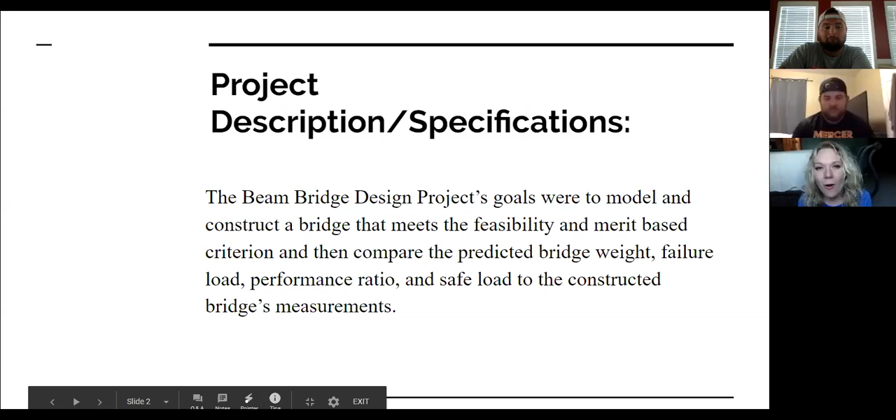We decided to name our team the Warren Buffetts, and we know Warren Buffett has nothing to do with Warren Bridges, which is what our project was about. But we felt like we had to name our team that, especially with this picture, because it accurately depicts how confused we were by this project. Also, the bridge on the right is not a Warren Bridge, but Tanner found it aesthetically pleasing, so he decided to add it to our title slide.

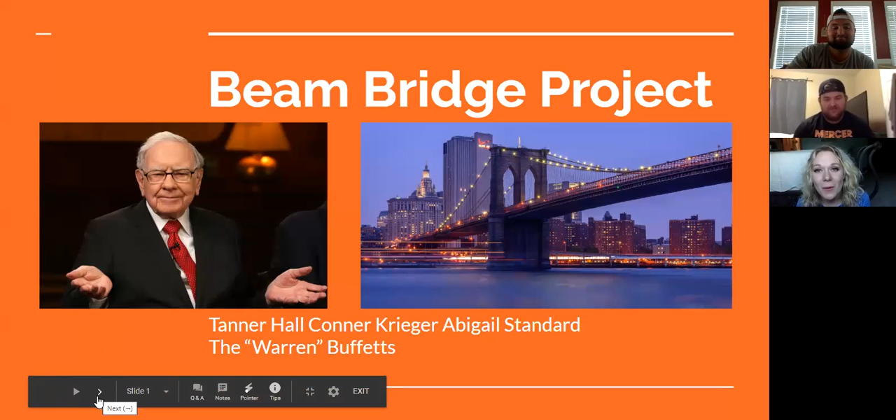Project description and specifications: the Beam Bridge design project's goals were to model and construct a bridge that meets the feasibility and merit-based criterion, and then compare the predicted bridge weight, failure load, performance ratio, and safe load to the constructed bridge's measurements.

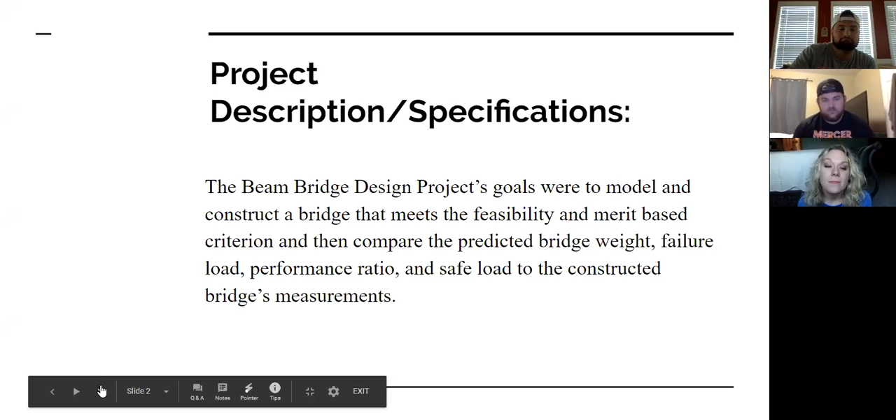This is the feasibility criteria used for the Beam Bridge project. The inside of the bridge must be 2 inches wide and at least 1 inch high. The inside of the bridge must be able to accommodate a road bed, so no sharp peaks. The bridge base must be between 9.9 and 13.8 inches wide, and only contacts the top surface of the buttresses. The eye bolt and chain for testing can pass through the center of the bridge. The testing block, 3.5 by 3 inches, can be supported on top of the bridge. The bridge uses open style truss construction, built with 1/8-inch by 1/8-inch bass wood beams and wood glue. And an object 3.4 inches wide and 1.82 inches tall can pass under the center of the bridge.

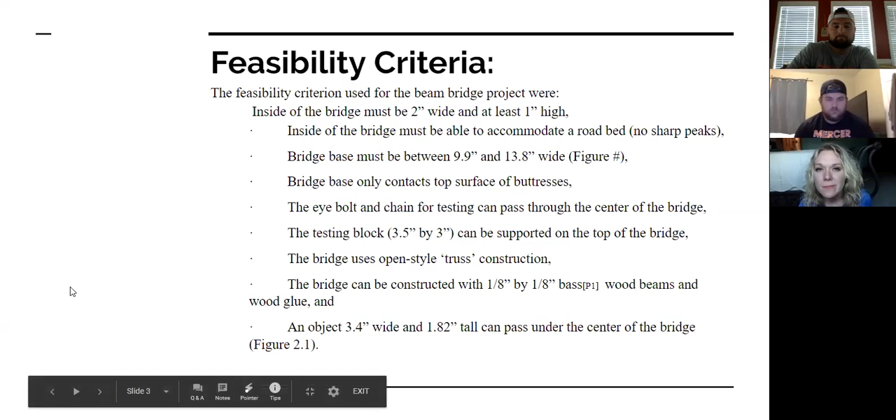The merit criteria measure the bridges on their individual performance ratios and their ease of construction. Each of these criteria is worth 50% of the overall merit points given to each bridge, since they are both deemed of equal importance when choosing, modeling, and constructing the bridge.

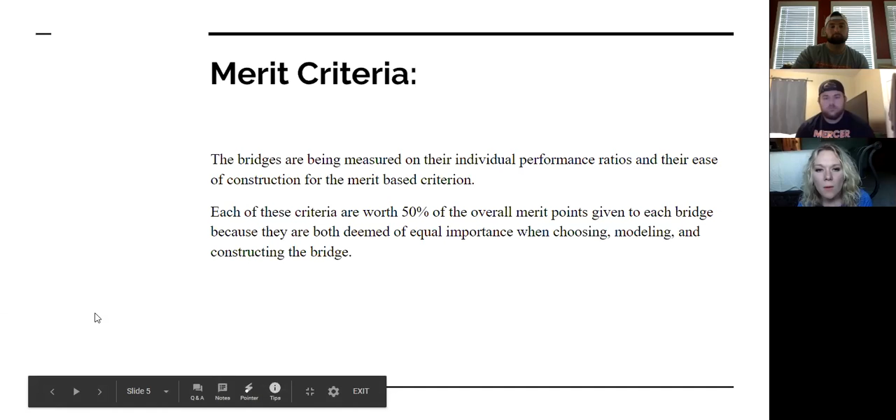This is the ease of construction merit curve. The easiest bridge would have been given 10 merit points, while the hardest bridge would have been given 0. Our bridges all fell between 0 and 10, but none were exactly 0 or 10, since we had to be between the easiest and hardest bridge possible.

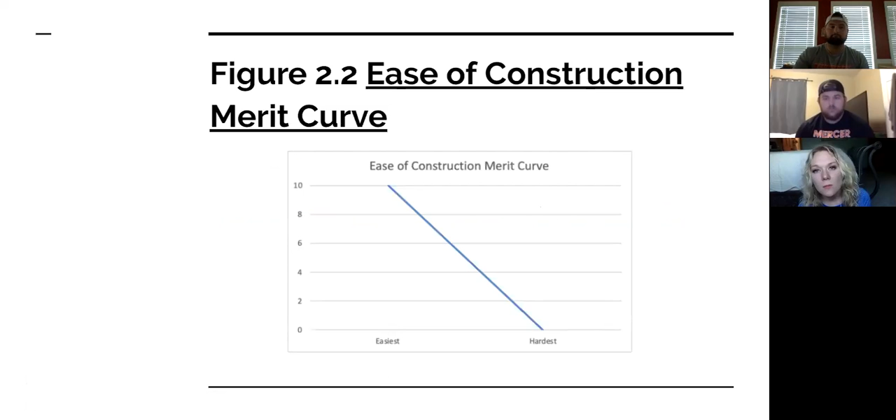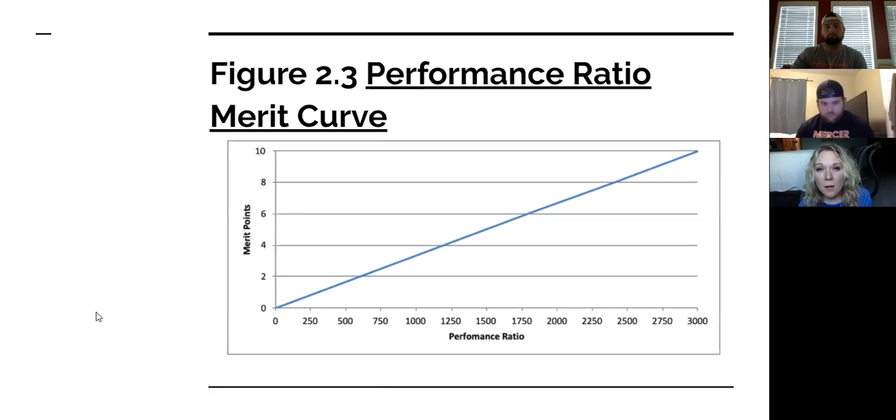This is the performance ratio merit, ranging between 0 and 3,000, which is a bit higher than where our bridges fell. A performance ratio of 0 would give 0 merit points, and 3,000 would give 10 merit points, with our bridges falling in between those points.

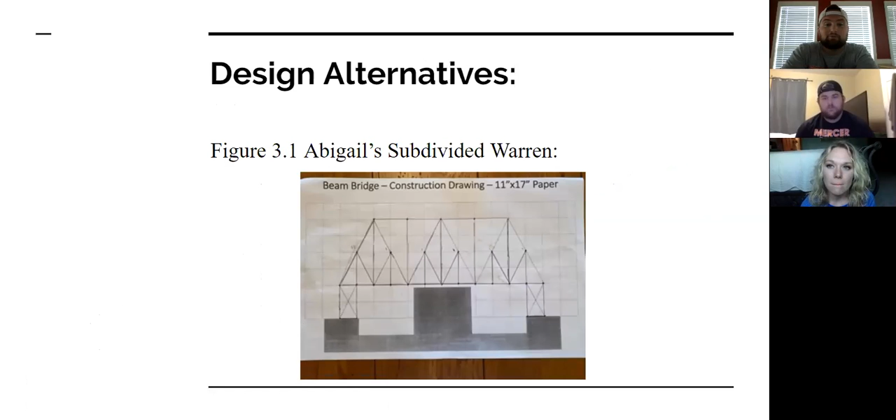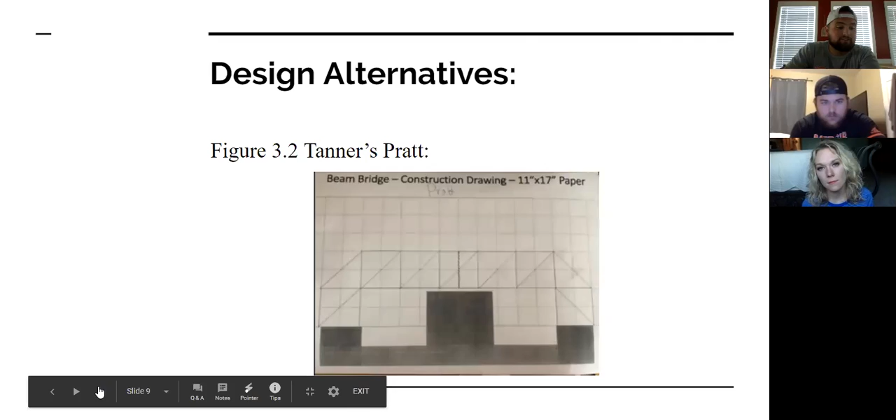For the feasibility analysis, we just went over the criteria we needed. Ultimately, all of our bridges met the feasibility criteria, labeled by the O's here, and as you can see in each column, all of them are checked off, so all of our bridges were feasible.

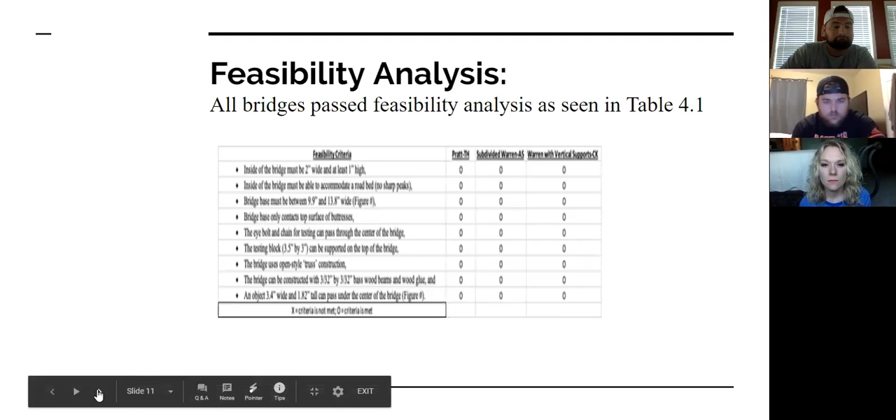Now on the merit analysis, we just talked about the performance ratio and ease of construction as our merit criteria. But before we get into that, we're going to talk a little bit about the predicted models that we built for each alternative.

My Pratt Bridge: the predicted weight was 10.24 grams. The failure load was 18,914.8 grams. The performance ratio was 1,895.45, and the predicted safe load was 9,457.4 grams.

The subdivided Warren Bridge, Abigail's bridge: predicted bridge weight was 24.95 grams, predicted failure load was 8,073.94 grams, predicted performance ratio was 323.6, and the predicted safe load was 4,036.97 grams.

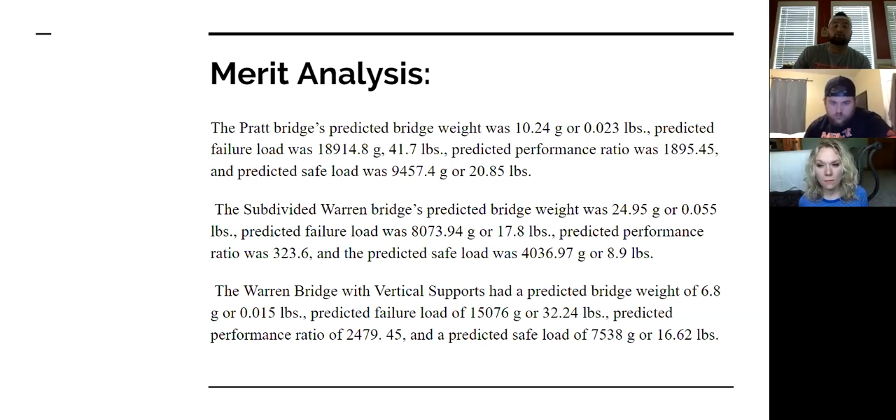And Connor's Bridge, the Warren Bridge with vertical supports: predicted weight was 6.8 grams, predicted failure load was 15,076 grams, predicted performance ratio was 2,479.45, and predicted safe load was 7,538 grams.

Now on to the specific merit analysis, starting with the performance ratio. My Pratt Bridge received 7 points out of 10 for a performance ratio of 1,895. Abigail's subdivided Warren Bridge received 1 merit point for a performance ratio of 323. And Connor's Warren Bridge with vertical supports received 8 merit points for a performance ratio of 2,479.

The subdivided Warren, which was Abigail's design, received a 1 because of the number of members and joints it took to build that bridge. The Pratt and the Warren Bridge came out pretty even with the number of joints and members, so they both received an 8 for ease of construction.

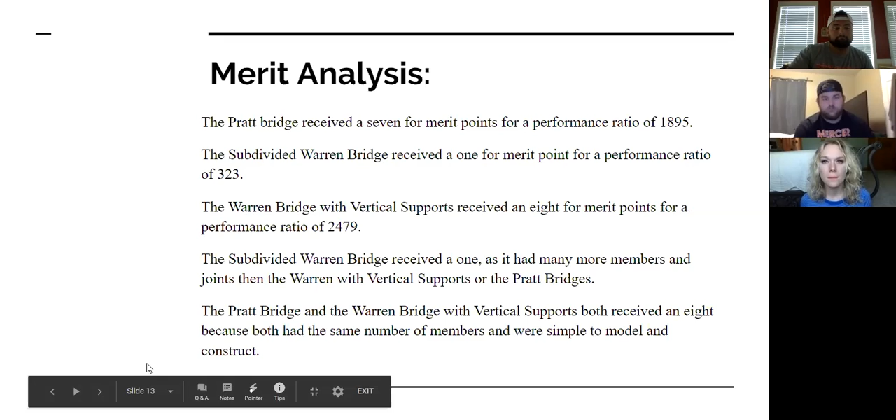This is an easier view of our merit analysis. Like we talked about earlier, ease of construction and performance ratio were 50% each. You can see the totals on the far right of each bridge: 150, 750, and 800. So ultimately, we went with the Warren Bridge with vertical supports because of the 800 merit score.

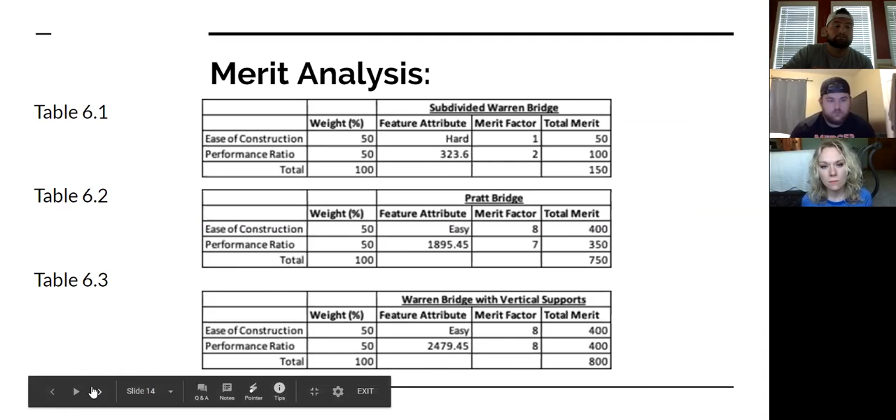After all that, Tanner explained we're going to go with the recommendations that our designs had. The one that Abigail did, the Warren Bridge, received a total of 150, and that was the lowest merit performance we had, along with being the hardest construction. So we didn't go with that one for obvious reasons, being so hard to construct.

The Pratt came in next with 750 merit points, which was a high performance. But then the Warren Bridge with vertical supports actually went a little higher with 800. With both of them having easy construction, we relied on merit points here to decide which one we wanted to do. So at the end, the Warren with vertical supports was what we went with, having the highest merit score.

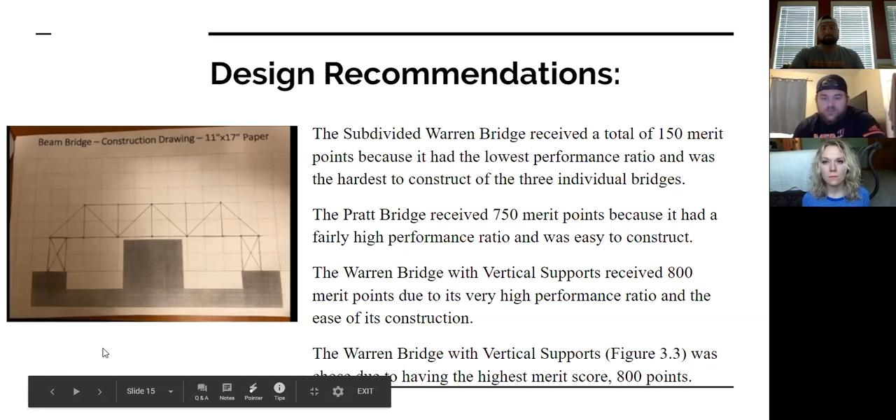The next part is the testing plan. The testing plan was conducted by Dr. McCreanor. We witnessed it over a Zoom session, so we analyzed how the plan went through.

First, he weighed the bridges, and then he pushed a block under it to see whether it met that height clearance criteria. Then he put a weight harness constructed of a string or chain with an eyelet and a wooden block that sat on top of our trusses. Then he hooked a bucket under it, which he placed sand into, and the bucket was hooked up to the bridge through the harness.

He kept filling it with sand until the bridge failed and broke. After that, we measured our performance ratios, and he weighed how much the sand, bucket, and harness apparatus all weighed, put it on the scale, and we got our full weight of failure from that.

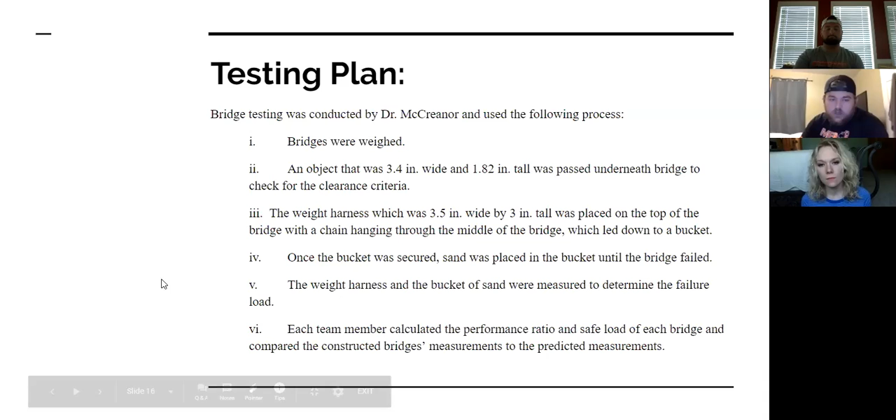I'll get a little more into the comparison of the two, the Modelsmart and the real life construction, next, and this will hopefully clear it up a little better.

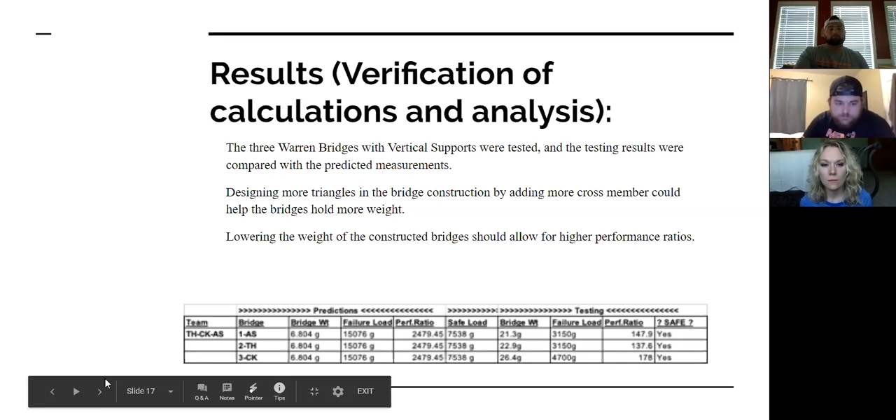None of the bridges matched what the Modelsmart predictions were. All 3 bridges had a lower performance ratio than the one that I modeled in Modelsmart, with 2,479.45 — we were actually well below it.

All of them we built heavier than what was in Modelsmart, due to either human error or lack of understanding of how to construct the best bridge. We couldn't match the weight, so that would push the performance ratio way down, and that's how they matched up with the two.

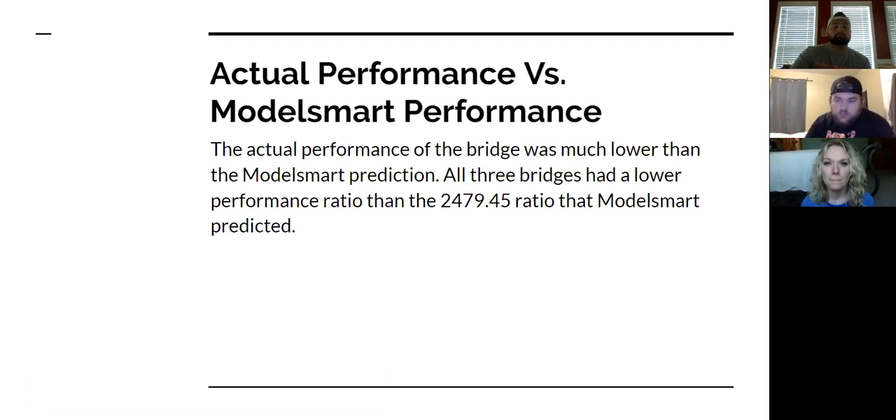We learned about overall failures of bridges and how to test bridges, I should say. But at the end of the day, we understood that the model bridge is not going to compare to the real life bridge — that was the biggest part. The intricacies of how to make triangles into a bridge will also make the structure stronger, and putting cross members in certain areas, such as the supports, would allow for more weight to be held.